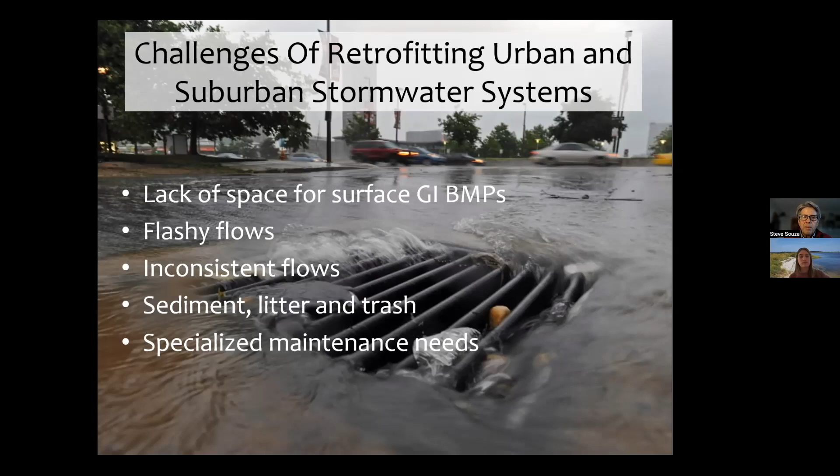And this is where manufactured treatment devices come into play. These can be considered sort of a green-gray stormwater solution. They are recognized by DEP as part of our green infrastructure approach, but in most ways, they actually replicate a lot of the conventional gray stormwater management solutions that are already in place.

The big thing about MTDs, or manufactured treatment devices, is that the majority of them are subsurface. So now you can get away from the problems associated with not having a lot of land mass available for constructing new structures. They are scalable, meaning I can use them on very small applications, maybe even for a driveway. I'll show you some examples where they could be used for an individual parking lot, or they can be used in series to manage runoff from a larger drainage area.

Often there's no need to make any major changes to the existing stormwater collection system, so you don't have to alter the pipe network, which is a big cost saving. As I mentioned, they are accepted by DEP within a given set of parameters as an acceptable way of managing stormwater runoff. They do a really good job in mitigating peak flow, which means they can decrease erosion problems downstream and even some flooding problems downstream.

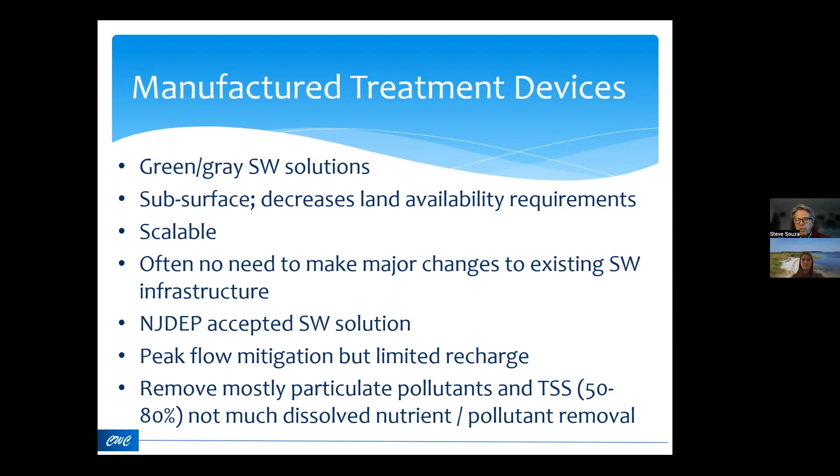As I mentioned, they are accepted by DEP as a stormwater management solution, even for major development, for new development.

If you want more details, you can go into the stormwater regulations, NJAC 7:8. MTDs need to be verified by New Jersey CAT, and certified by New Jersey DEP, to be used as part of satisfying stormwater requirements for new development. They can also be utilized as a means of managing stormwater for projects receiving funding from the New Jersey Environmental Infrastructure Financing Program.

Again, they need to be CAT verified and DEP certified, or installed in keeping with the finance program policy. Finally, an MTD that's not CAT verified or DEP certified can still be used, but only if it's not intended to satisfy those stormwater regulation requirements, or isn't subject to the funding requirements of the financing program.

There's a whole list of MTDs out there that are certified for use, and you can go to this link to learn more about each one. As you'll see, they take a lot of shapes and sizes, and they do have their application in managing stormwater runoff to Barnegat Bay.

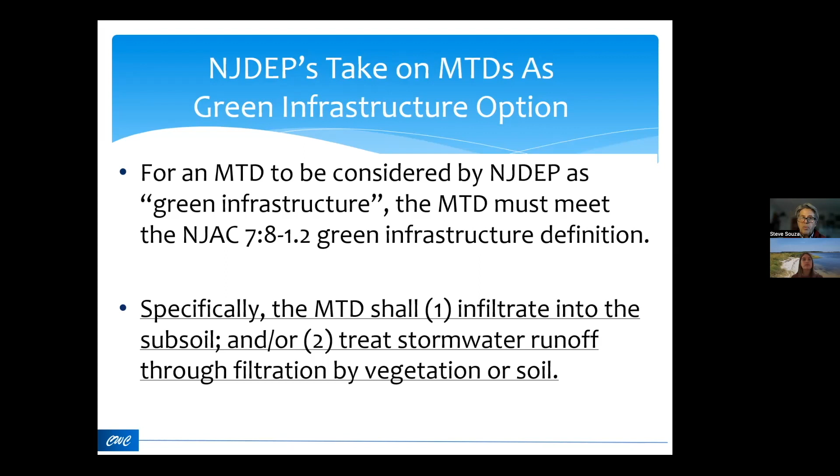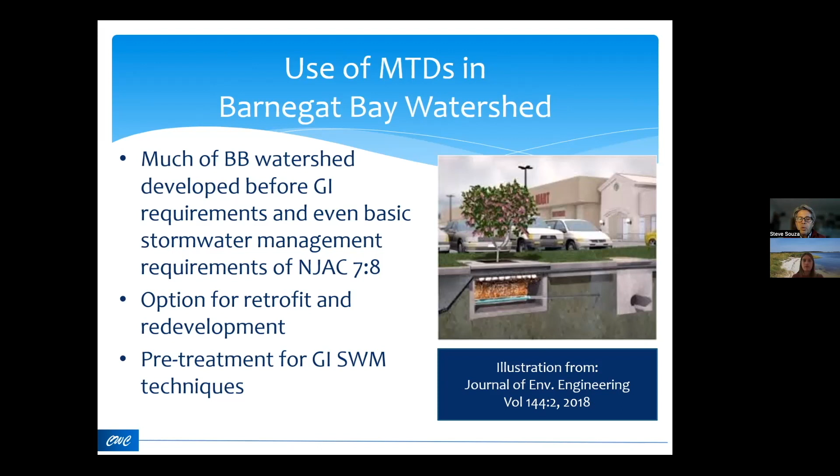For use in Barnegat Bay, I think there's a lot of applications because we have a lot of lands that have been developed well before New Jersey had any stormwater regulations in place - that's well before 1985. As I mentioned before, they're a great option for retrofit and redevelopment types of projects, and can also be utilized as a pre-treatment technique in combination with other green infrastructure stormwater management applications. There's a whole host of different types of manufactured treatment devices out there.

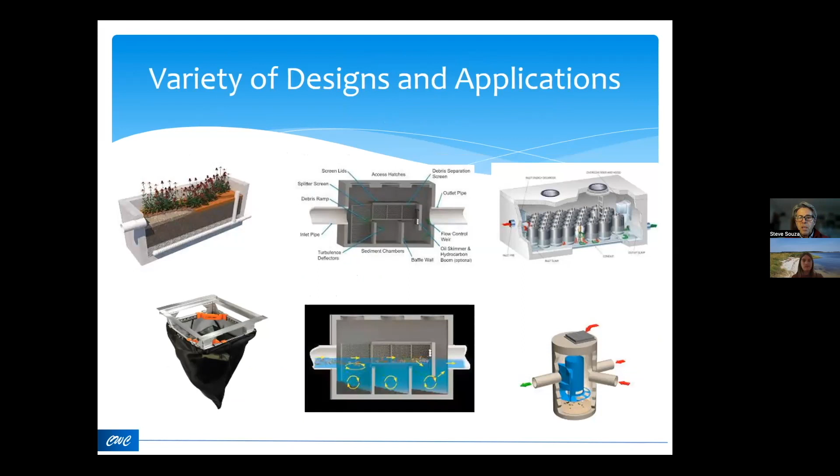We'll look at some applications of differing size and capabilities, going from small to large, with and without plants. We'll look at basin inserts and filter bags - these would be the most simple, but they have their limitations. Then tree boxes and planter boxes, which are becoming more commonly implemented not only in retrofit applications but new development. Then some larger chambered baffle boxes or large chamber boxes that include swirl condensers, working sort of like a hydrodynamic system that causes material to settle out within those chambers.

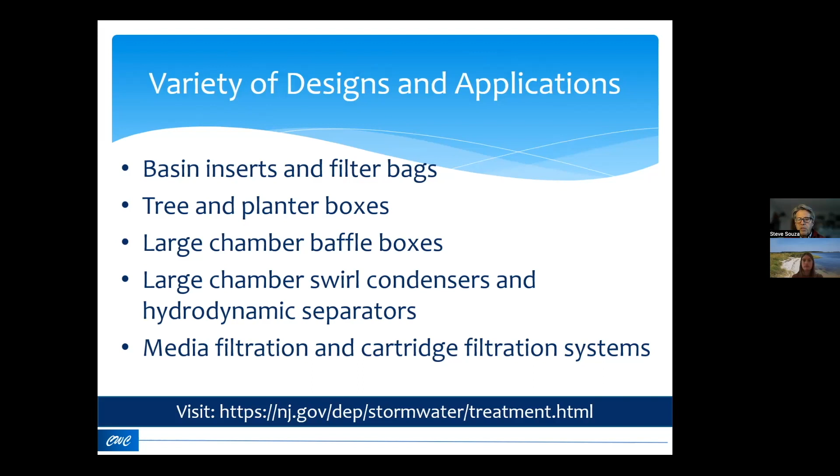There's some other ones that I won't get into today that actually use some type of filtration or cartridge system. Those are very expensive and not that popular, simply because replacement of those filters takes specialized equipment, and each filter or cartridge can be very expensive. So there's ways to use MTDs that don't necessarily require these filter cartridges to achieve those benefits.

Let's look at one of the most simple techniques, which I've used in a lot of applications - they're being used statewide. These are simple catch basin inserts, this one manufactured by FlexStorm. Essentially that filter sits inside of a conventional catch basin, and its function is to remove sediment, leaf litter, other types of trash - particulate removal. These are designed to treat the runoff generated by that 1 year storm event, about 2.75 inches over 24 hours.

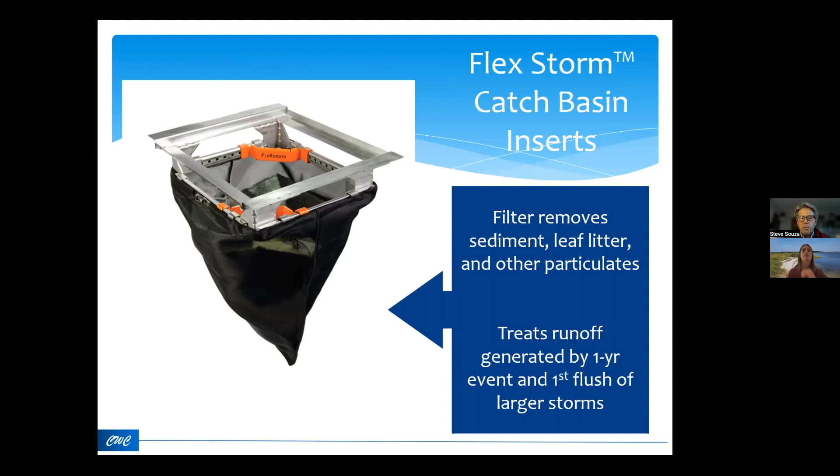A storm of that magnitude has a 100% chance of occurring every year. Smaller storms, as well as the first flush of storms in excess of the 1 year storm - the larger events - anything exceeding that 1 year event would be bypassed through or around the filter, preventing resuspension of material already captured within it. The really cool thing is that those steel frames can be custom designed and fit into any type of conventional basin, so in older developments with irregular catch basins throughout, these work really well, and I have used those in these applications.

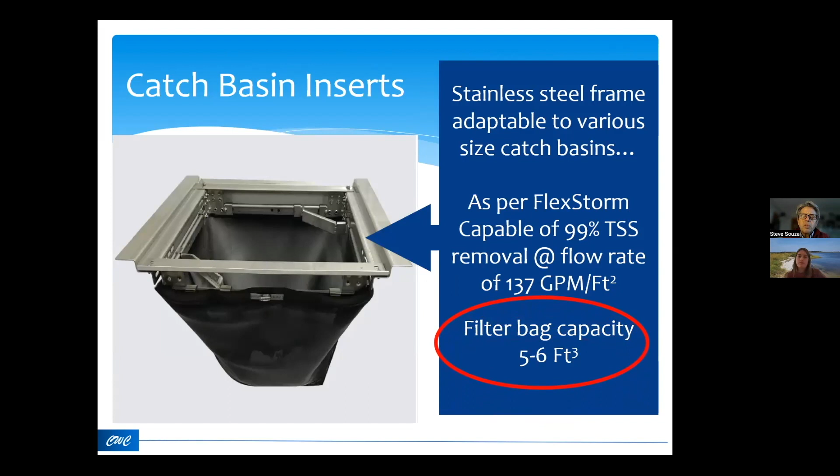The downside is really that they have very small capacity, only about 5 to 6 cubic feet, maybe about what you would put into a standard wheelbarrow. So that means they need to be inspected and cleaned out on a pretty regular basis.

This is an example of a catch basin that's being modified with one of these filter bag inserts. You can see here essentially what the public works personnel are doing is clearing all the material that had accumulated at the bottom of that catch basin. Once that's removed, they insert the filter frame and the bag.

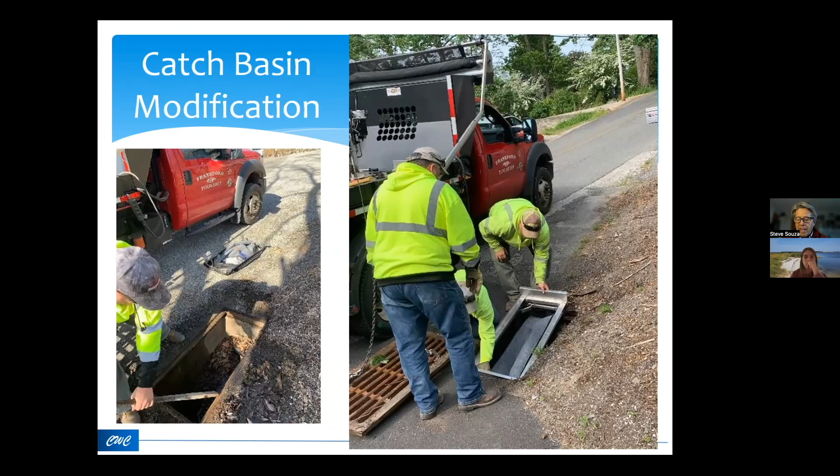And then subsequently, they come out and inspect. In this application, they're being inspected once every 3 months, and then a determination is made based on visual inspection as to whether they need to be cleaned out.

They can be extracted in total, as being done on the left side, the grate, the frame, the bag, and then dumped into the back of a dump truck. Or what's easier is to come in with a vac-all and basically just suck out all of the material that has been collected by the filter bag and then proceed to the next one. That's a lot quicker and easier way to clean these out without destroying bags or adding to the amount of labor associated with the cleanup process.

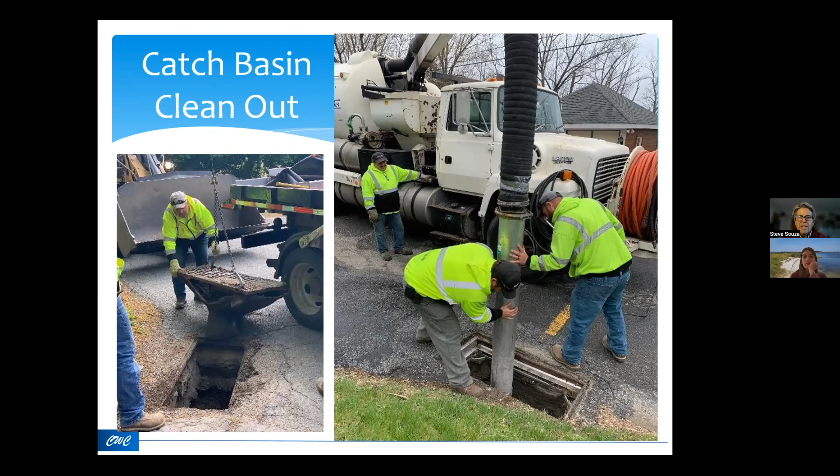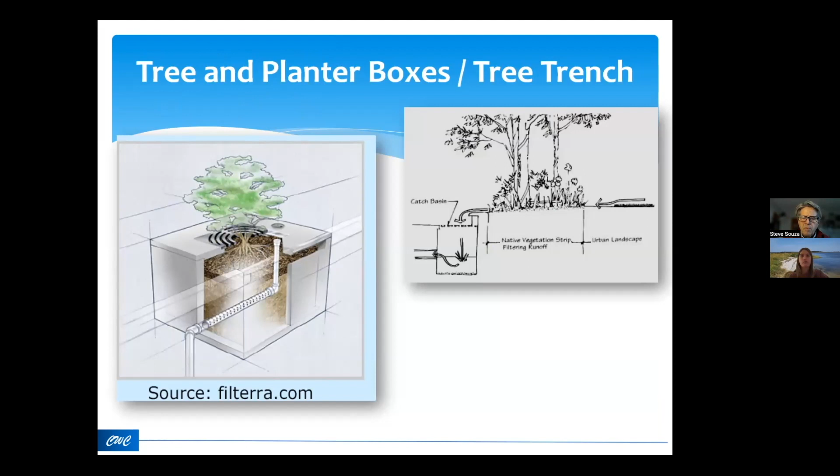So that's an example of a small scale MTD. We can then ramp up to some larger scale applications—tree boxes, planter boxes, tree trenches that a lot of you have become increasingly familiar with. Essentially, these use a combination of a special type of soil mix along with plants to filter, assimilate, and remove pollutants, including dissolved pollutants from stormwater runoff.

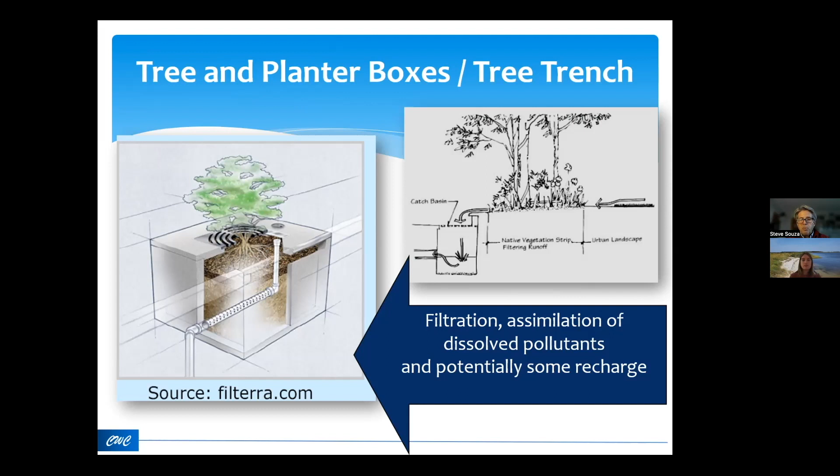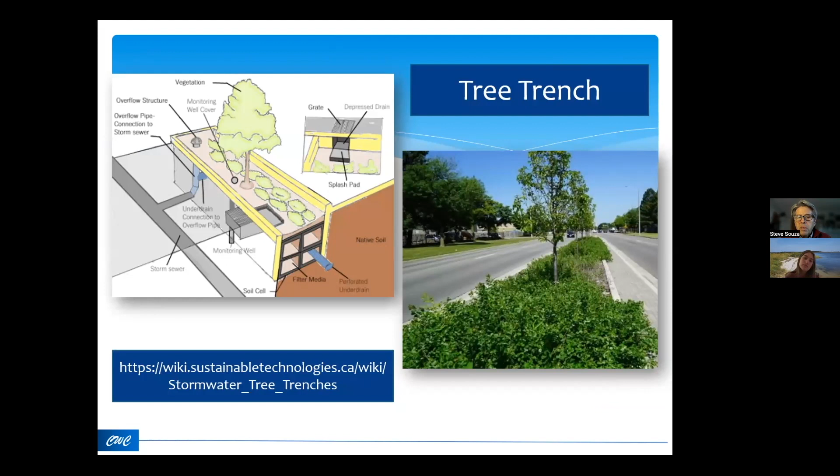Some of these can be designed with an underdrain or perforated bottom so that you can actually promote some degree of recharge as well. Here's an example of a tree trench that's been placed in the middle of a roadway median. You could do the same thing in the middle of a parking lot. Essentially you can see here, we've taken up no additional space—this was just macadam before, and it's been replaced with some type of functioning stormwater management system.

Planter boxes work in the same way. These tend to be a little bit more custom designed—they're concrete boxes, think of them sort of like a big planter that you would set into the ground. Again, all of these manufactured treatment devices are designed to work primarily with those commonly occurring storm events, the 1-year and smaller, or the first flush of the bigger events.

The key thing here, as is the case with the planter boxes as well as those tree trenches, is that we're using a combination of a specialized bioretention soil mix with a variety of plants. So it's the plants, the soils, and the ability to hold that water for a given amount of time that increases the amount of pollutant removal.

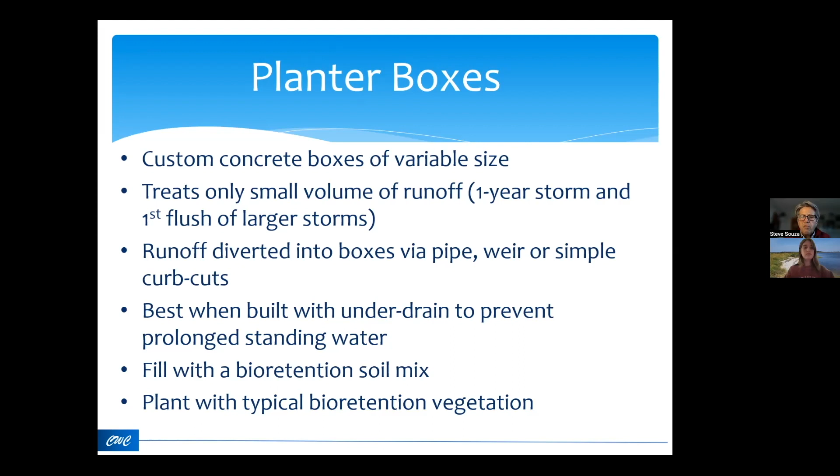I'm going to show you an example of a project that was done at Toms River High School North. This was with 319H grant money administered through New Jersey DEP, and the project lead on this was the American Littoral Society. Essentially, we had an opportunity here at the entrance to the gym to implement and install a couple of tree boxes.

You can see these boxes can be fairly large—this one's roughly about 30 by 20. It starts off by excavating a pit down to the bottom. A lot of those pipes that you see there are all the existing infrastructure that needs to all be accounted for during the design, construction, and installation process.

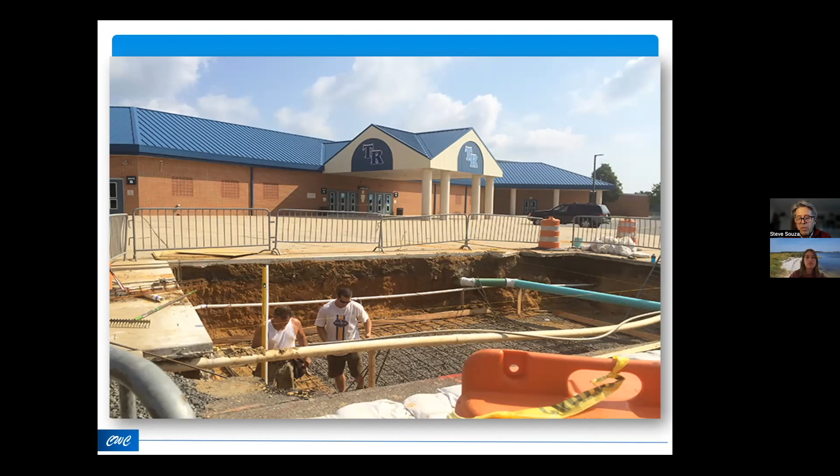But essentially what's being created here is a custom concrete box with an underdrain, so this does have the ability to allow some of that collected runoff to drain back down into the subsoils. This is the process—again, you get a sense of how big this is by just the scale of that individual standing in the bottom of the box relative to the top of the box.

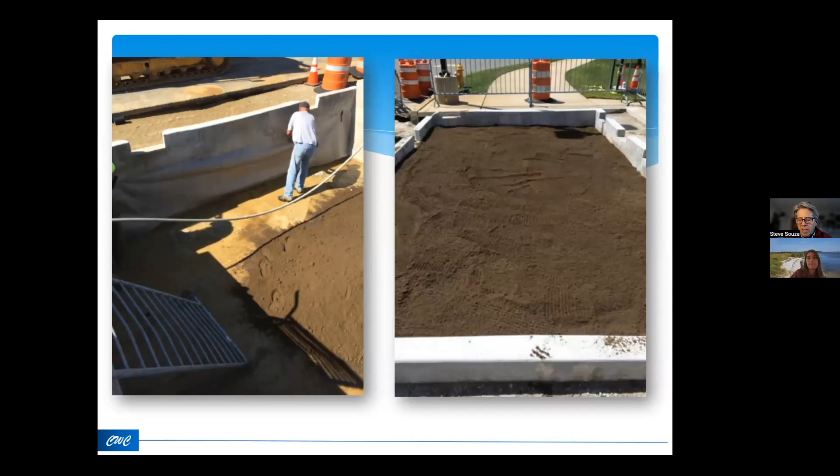And this is all filled in with a specialized bioretention soil, high sand content, about 80% sand, and around 15 to 20% organic material by weight. Getting close to getting ready to plant the boxes.

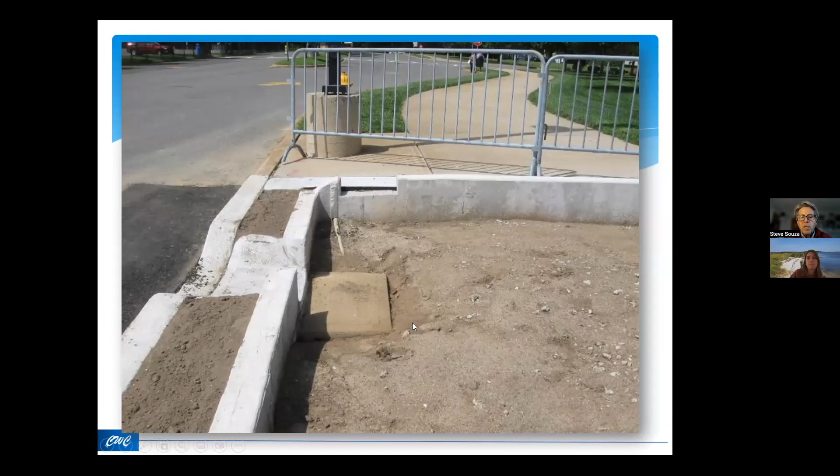Here you can just see all that was done is that these simple little curb cuts were created so that as water flows down through this, primary access to Toms River High School North, stormwater can discharge into the planter box and be treated. This is what the planter box looked like about a year following completion. On a rainy day, stormwater comes down the road, enters via this curb cut into the basin, and is treated by the combination of soils and vegetation to reduce pollutant load, as well as put some of that runoff back down into the ground.

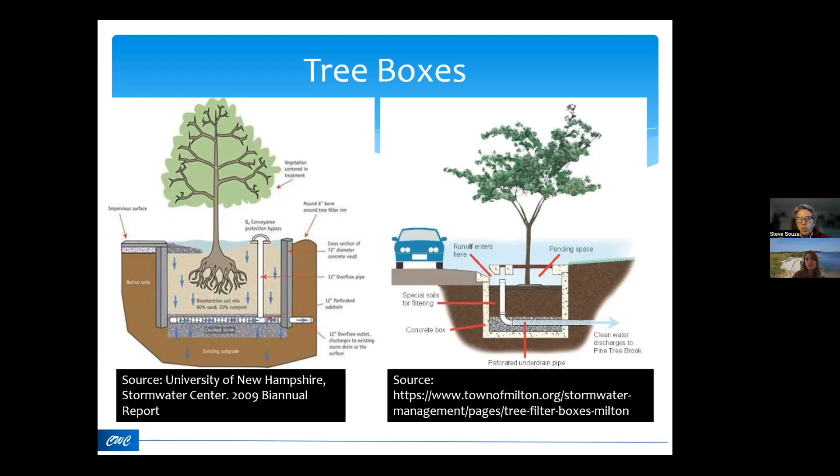Tree boxes are a similar type of concept. However, most tree boxes come from a variety of different manufacturers and come in a pre-designed size. They work either similar to that Toms River example, where you can do curb cuts, or you can actually route flow directly into the tree box.

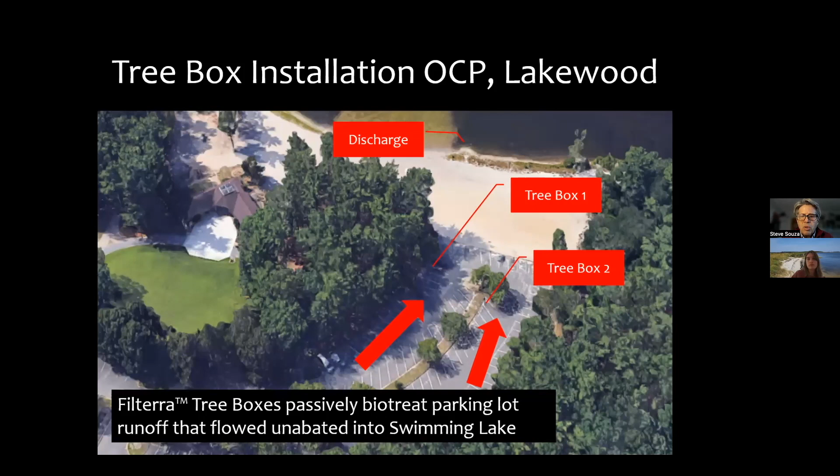Here's an example of a project I worked on at Ocean County Park in Lakewood, where we installed a couple of tree boxes in one of the parking lots that service what's called Swimming Lake. Here are the boxes after installation. Prior to this, all of this runoff would discharge to this catch basin that would then just discharge into the lake without any treatment.

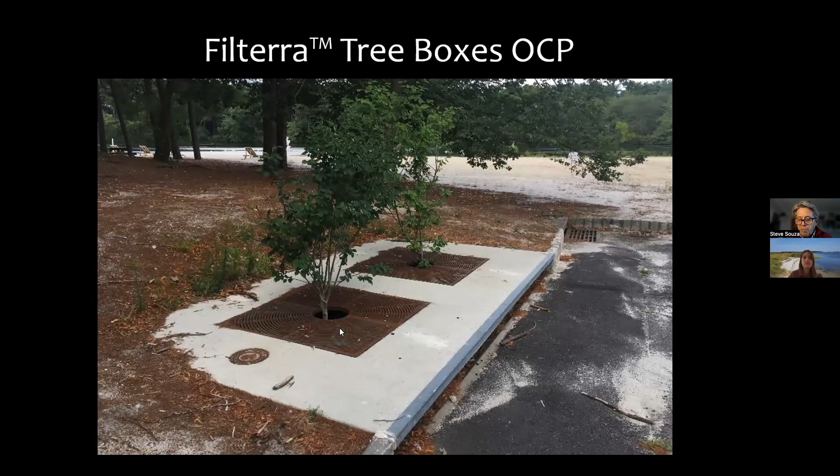Now the first flush, storms up to the 1-year event, enters the tree box, where it's treated by a combination of vegetation and bioretention soil. This is the second box, and here's the first one I showed you. Again, any overflow goes into that catch basin, but this is designed to collect all of the runoff from the 1-year event and smaller storms.

Remember, that's 2.75 inches of rainfall, and anything less than that gets routed and completely managed by this tree box. Anything in excess of that—it collects that first flush, and the overflow is managed by the catch basin. So there's no alteration of the existing pipe work; this is just being put adjacent to and working with the existing pipe network.

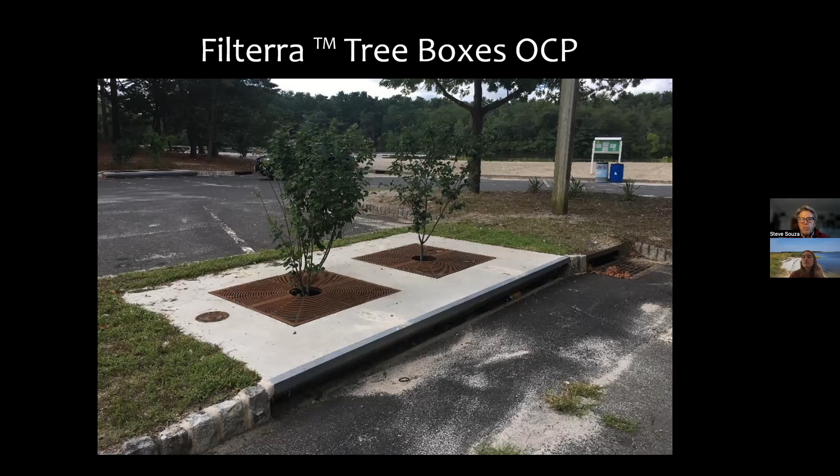I'll give you another example. This is an extension of that project done by American Littoral Society, where we installed a fairly large Filterra tree box, about 91 square feet, in one of the parking lots. All that was done here was to modify the curb line to allow water to enter the box as opposed to just flowing into a large catch basin. These were planted, as with the Ocean County Park example, with serviceberry.

So this is the project after completion. You can see this curb used to just run directly along here. All of this runoff would cascade down off the parking lot and into a catch basin and then into one of the headwater streams to Barnegat Bay.

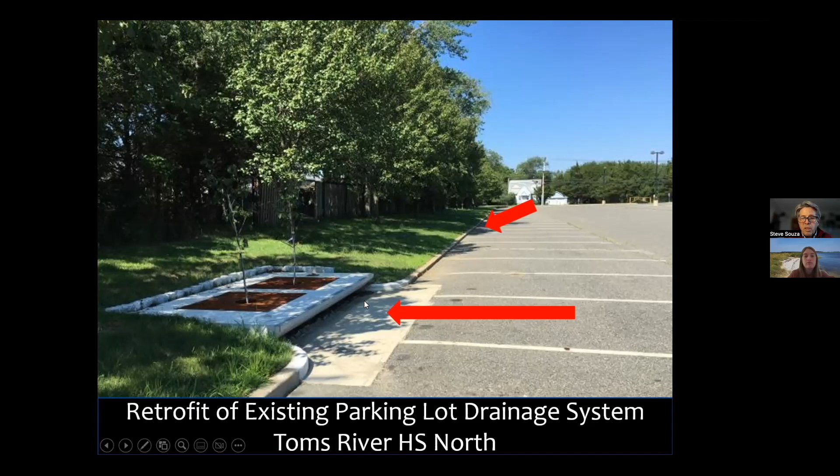Here we have our box in place with the serviceberries planted. Again, this is filled with that bioretention soil, and essentially runoff hits the parking lot and is channeled into this for treatment.

These can be used, as I've done in other applications, even in the middle of an existing parking lot, without making any alterations to the pipe network—these can just be set in place. In this particular application, there were 4 of these put into service.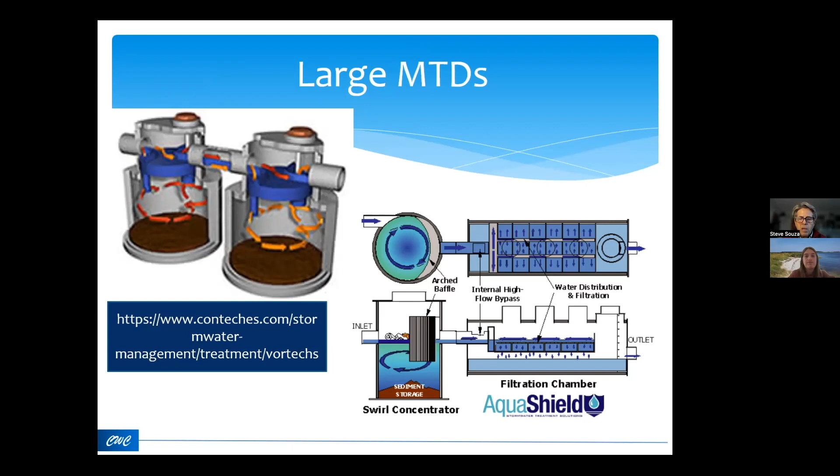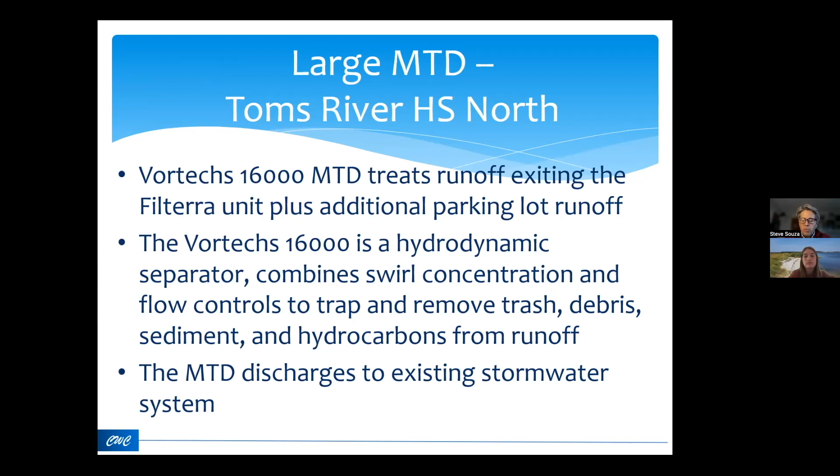I'm going to show you some more examples. This again is an extension of what was done at Toms River High School North, through American Littoral Society. This is a pretty large unit—you can see it going into place. Essentially water comes in through the existing pipe network into this chamber, which is about 8 feet deep or so.

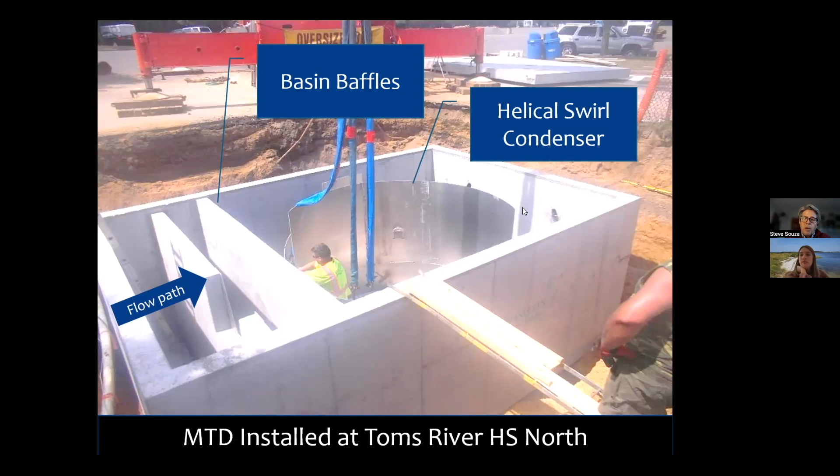This is the flow path. There's a series of baffles that help separate material out of that flow path, first by slowing it down, capturing particulate material and trash. This helical swirl condenser, as water enters, dissipates energy and causes more sediment and particulate material to settle out before the water exits the basin into the existing pipe network.

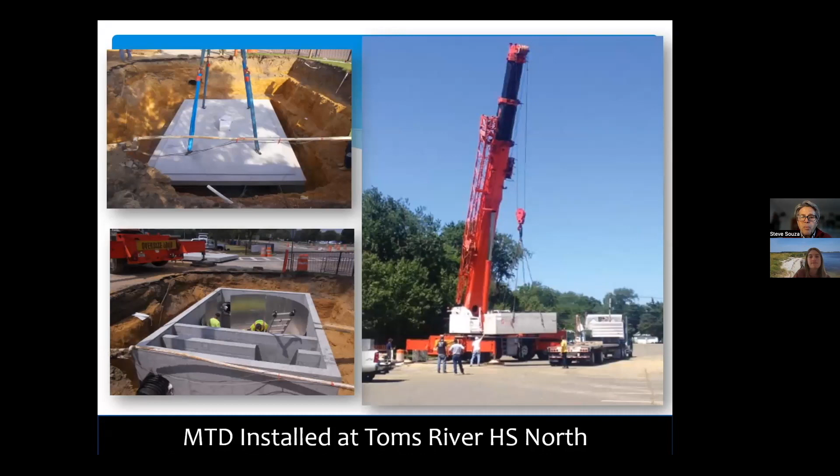Just to give you a sense of the scale of this project, this is one of probably the largest MTDs that you would be working with. This is a pretty large structure, and it's managing a fairly large amount of drainage area, probably on the order of around 8 acres of impervious cover.

These are some other installations that have been done through the Deal Lake Commission at Asbury Park, in the middle of existing roadways or at the terminus of existing roadways. Again, because of the limited amount of available space, these MTDs are part of the stormwater management solution being used to decrease pollutant loading to Deal Lake.

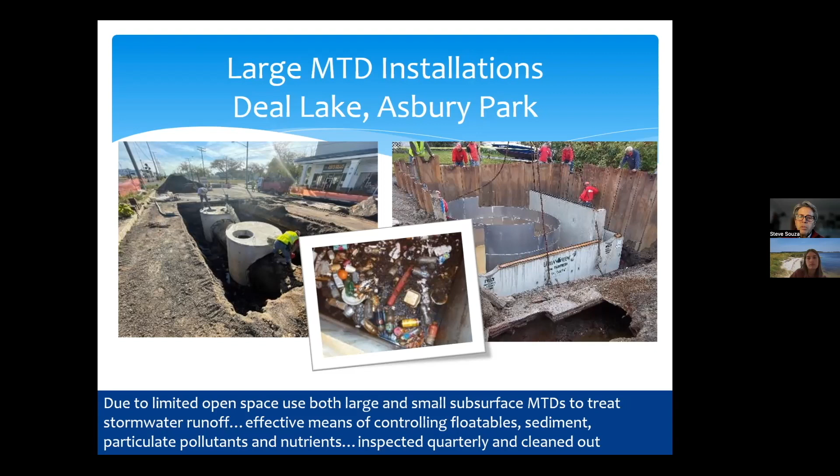They are inspected on a quarterly basis, and typically, depending on the amount of flow and material, you can see here there's a lot of floatables that they collect, cleaned out either on a quarterly basis or maybe once every couple of years, twice per year rather.

This is one of the initial units that were installed, around 2011 or so. This represents about 6 months of accumulation. This is another one of those helical swirl condensers, put at the end of Comstock Avenue, right next to Asbury Park High School.

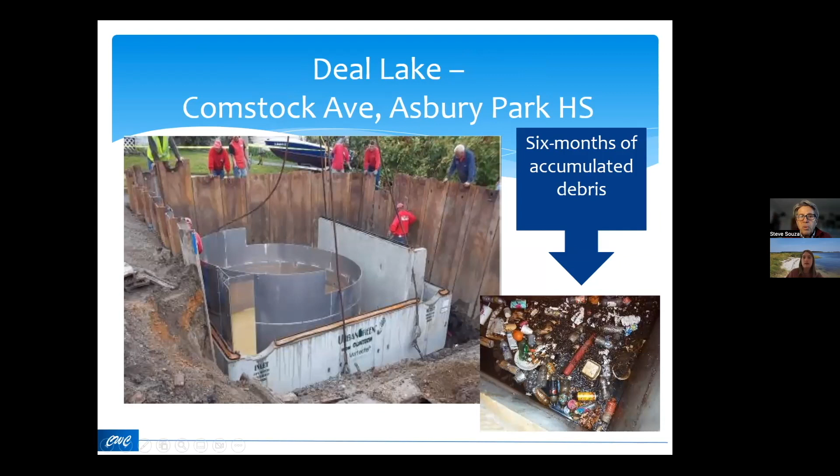Some smaller installations around Deal Lake. This is the much smaller box, probably only about 15 feet in length, but again another one of these helical swirl condensers. Water enters in this direction through the two initial baffles, and then additional treatment occurs.

This is really only after one of the first storms. We went back, popped the lids to inspect how this was working, and found even after just the first event, we were doing a pretty good job in terms of removing oils as well as trapped debris.

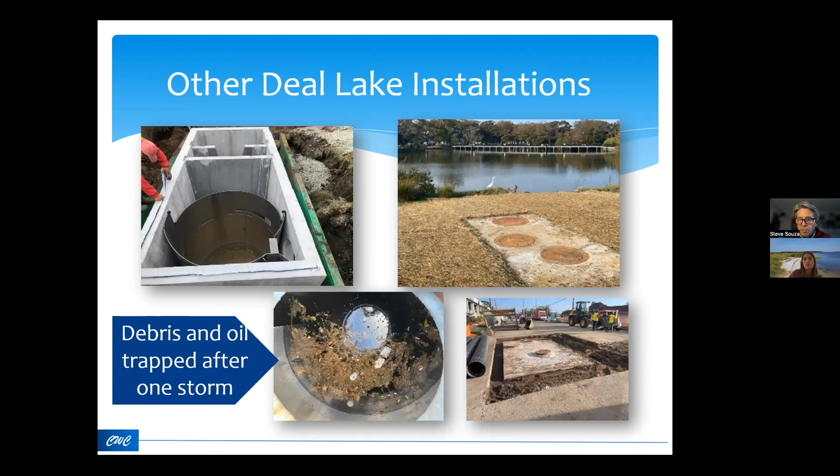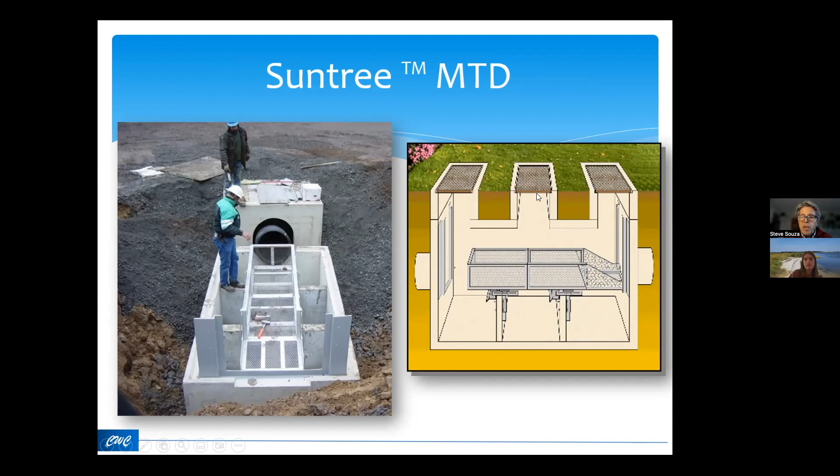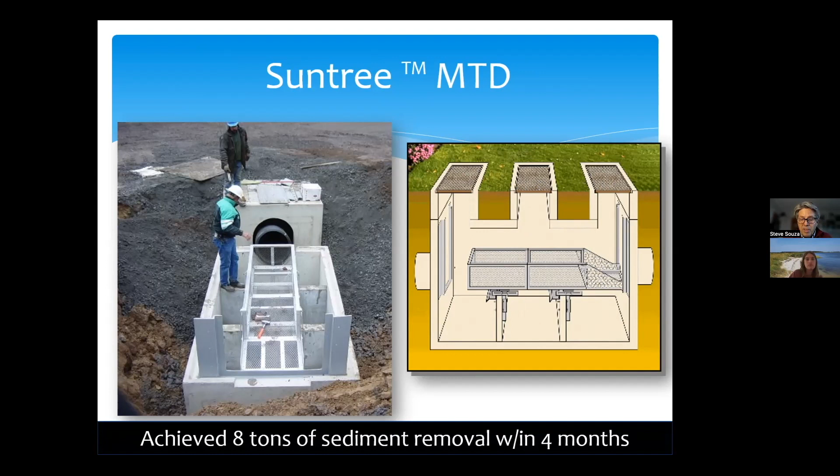Debris is trapped on the top of those screens, and then through conventional manholes or some type of grate, these can be accessed for inspection and clean out on a quarterly basis or maybe twice a year. This particular unit, a project I worked on, was documented as removing about 8 tons of sediment within 4 months. So that's pretty astounding.

So in summary, although MTDs are not true green infrastructure stormwater management solutions, they do a better job than conventional gray stormwater management techniques in terms of removing pollutants, particularly particulate pollutants. They're especially well suited for retrofit applications and use in urban and suburban areas, because they don't require a lot of above-ground land for installation. They can be installed without any major alterations to the existing pipe network or stormwater infrastructure.

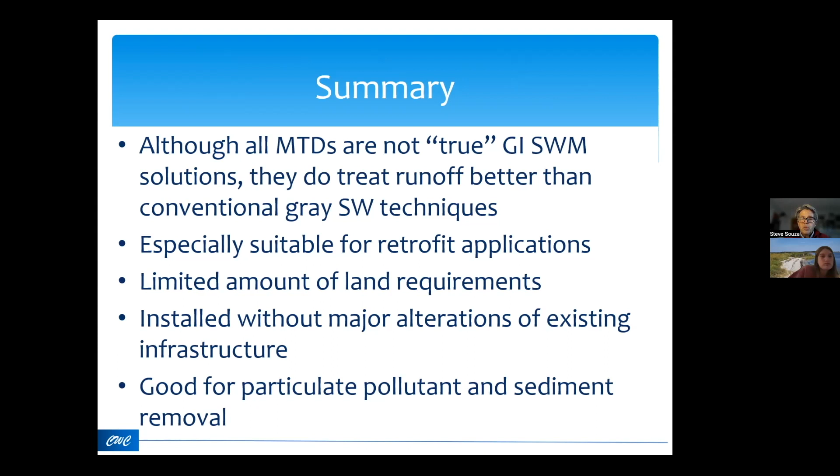They're really good in terms of removing particulate pollutants, floatables, and sediment. They do require frequent inspection and maintenance, whether we're talking about the small filter bags or the larger manufactured treatment devices, and that does require, in some cases, specialized equipment and trained personnel. But in a lot of these situations, this is better than what is there now and does provide a means by which to decrease pollutant loading to Barnegat Bay.

Some of these, like the filter bags, can only manage a small amount of runoff or limited catchment areas, but some of the larger ones can do a pretty good job even in managing a large expanse of impervious surface.

One really cool thing about them is that they can be linked with other green infrastructure management techniques, used as pre-treatment to increase pollutant removal. Think of it as a means of screening out all of the grosser, larger contaminants and leaf litter as well as floatables, then routing that pre-treated water into perhaps some type of bioretention area. That's done quite frequently in a lot of urban settings, with examples of MTDs used in combination with bioretention in Philadelphia, New York, even Newark and Camden.